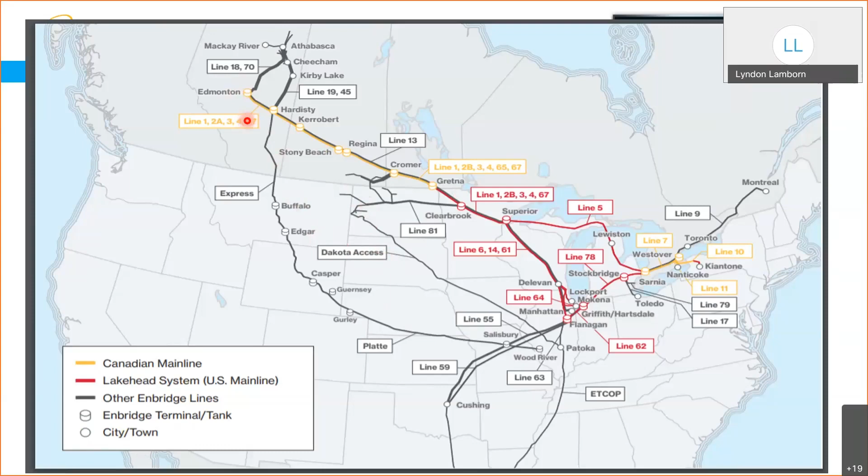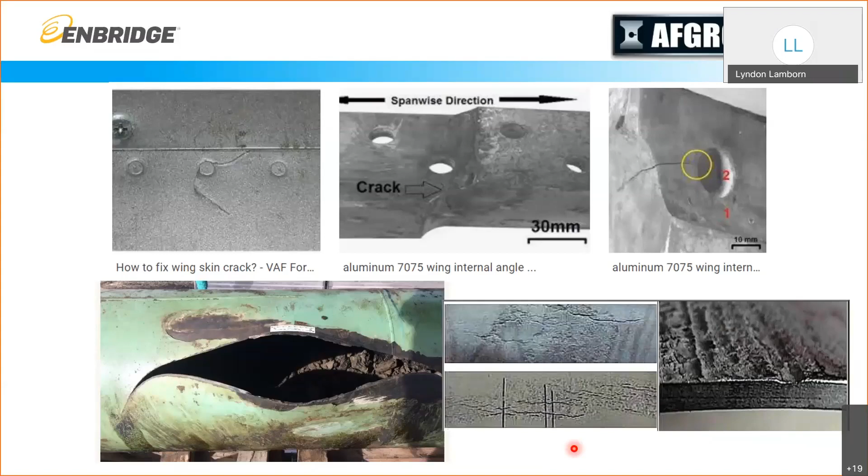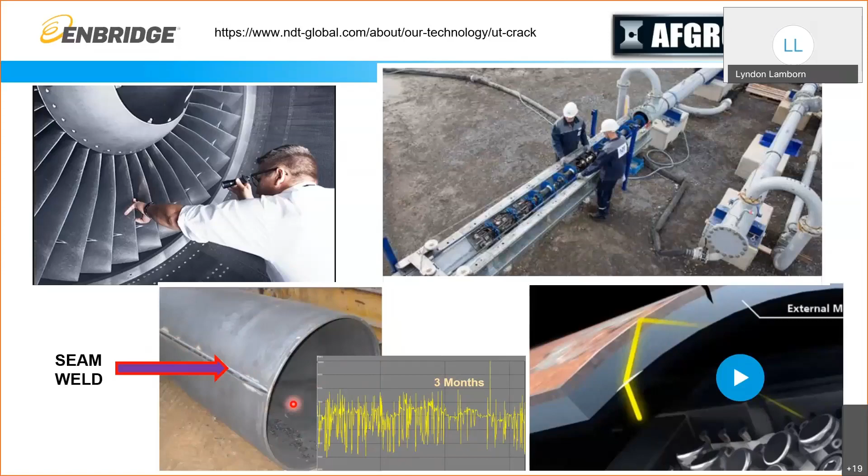And of course, this internal pressure change results in a cyclic hoop stress change in the cylindrical pipe, which all of you understand immediately gives you a cyclic stress with R greater than 0, particularly at this seam weld. And if you get a crack feature here detected by your crack tool that gives you dimensions, you can do crack growth analysis on that and predict how long it's going to last. So again, the similarities between aircraft crack management and pipeline crack management are huge.

So this would be a typical seam weld flaw that could grow and become a threat to the pipeline integrity that we're trying to avoid, and we invest a lot of money to avoid those incidents. In fact, you say, well, how much could these inspections really cost, Lyndon? You're just talking about pipelines here.

Well, I have 155 segments. We usually inspect between 3 and 7 year intervals, maybe average of 5 years. So I'm doing about 30 inspections a year on pipeline segments throughout the system. And a pipeline inspection can cost up to $1 million. Usually a little bit less than that, depending on the length and the age of the pipeline. But after you do 30 inspections a year, then you have to do excavations. You want to verify that your inspection tool is working properly.

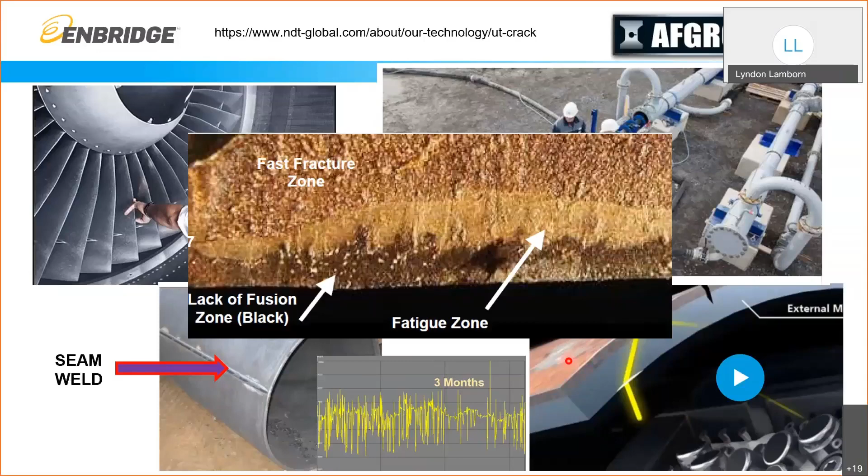So when I got to the pipeline industry, I was familiar with AFGROW and crack growth and looking at the threshold for no growth, which we use a lot in helicopters because helicopters are just flying fatigue machines. So we rely on characterizing the threshold for no growth quite a bit in helicopters. And imagine my surprise when I got to the pipeline industry, and the only thing anybody talked about was region B on the da/dN curve.

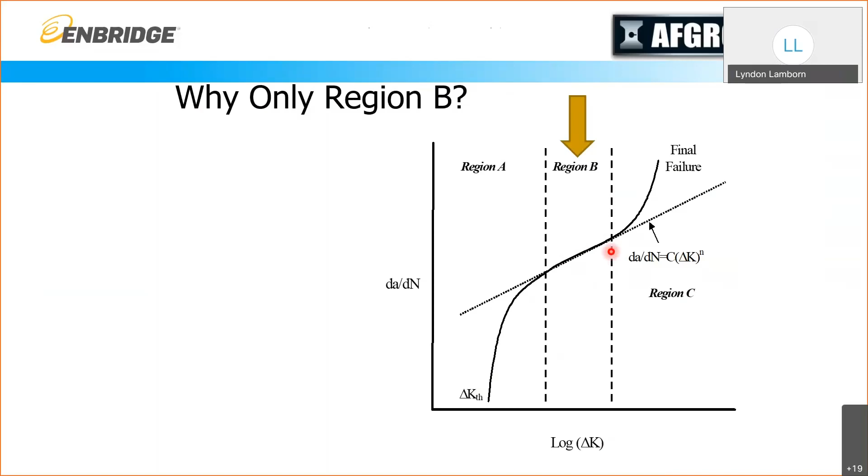And in fact, Jim could probably speak up at this point and echo his surprise. All the testing that we could find, or at least a large proportion of the testing we could find on pipeline steels, focused only on region B. There was nothing done outside region B. And so I was proposing, well, why don't we do some characterization of regions A and C and use the entire tri-region curve? Imagine my surprise when I got pretty much a negative response.

I was facing this situation, one of my favorite cartoons. Instead of evolution theory, you might put in here fracture mechanics theory, modern fracture mechanics theory. And the response I'm getting from most of my peers in industry is, this is hogwash. We don't need this. Region B is good enough. Even though we're spending hundreds of millions of dollars in crack management, all we need is region B. And so I'm stuck here on the second panel right now in the pipeline industry.

But I'm trying to move us toward this third panel where you see the emerging animal from the primordial soup here, that evolution theory, that modern fracture mechanics can be useful in the pipeline industry. And so that's kind of the mountain I'm climbing right now.

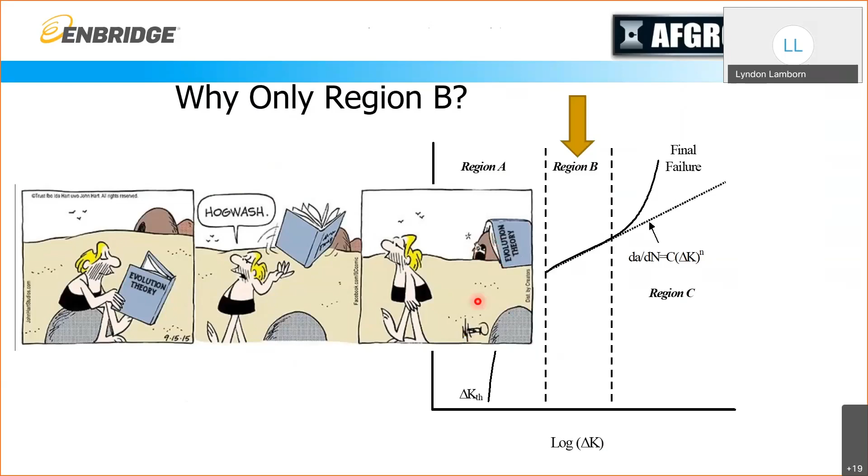So I asked Jim to help me look into establishing delta KTH, the threshold for no growth, for some pipeline steels. And as we kept peeling back the layers of the onion, I found some more data, and Jim found some more data, and before you knew it, Jim felt he had enough data to actually build a tri-region curve for a range of pipeline steels.

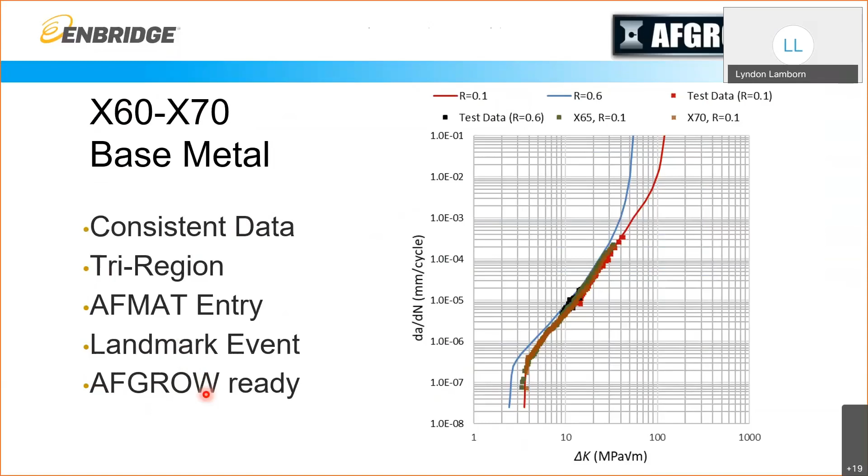Now, you say, what is X60 and X70? These are pipeline grades. 60 refers to 60 KSI yield strength, and 70 refers to 70 KSI minimum yield strength. And so for the first time, just in the last couple of months, we actually have pipeline steels in an AFMAT entry. And this is a landmark event. I'm very excited about it. And hopefully we'll get to do the others because that is only scratching the surface.

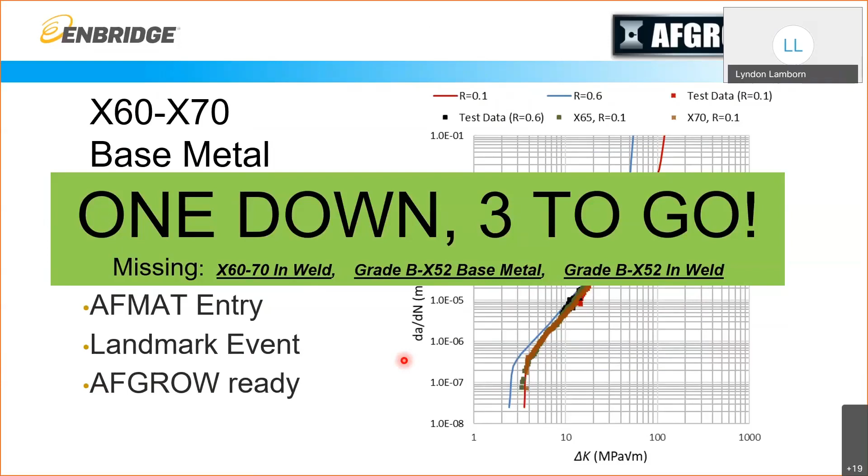The base metal; we do a lot of analysis for cracks in the weld, and so we'll need to characterize that, which the industry pretty much knows is a little bit different. And then we'll have to do it also for these other alloys, both base metal and weld. So just characterizing the material, which is almost an assumption for aerospace materials, that your materials are highly characterized and you have robust database information to go on immediately. Such does not exist in the pipeline industry.

So my last slide here. So we're really at a grassroots building block stage in the pipeline industry for use of advanced fracture mechanics. We're currently using it for these simple things, but these things have already had a huge impact. If we have to shut down a pipeline, it can cost us $50,000, $70,000, $80,000 per hour. And if we can avoid that through some advanced analysis techniques, obviously that's a good payback.

We are projecting in the future to use this aerospace level type analysis, particularly for root cause analysis. We feel like we learn a lot from our incidents in the pipeline industry, similar to what you folks do in the aerospace industry. With root cause corrective action, you can peel back a few more layers of the onion when you have advanced fracture mechanics to help you understand the stress states and the crack growth trajectories, as you know.

And then when I say a level 2 analysis method, for those features that are difficult to get to, say I have a crack underneath the Missouri River that I wouldn't be able to get to fix. I have to schedule a new pipeline replacement. I'd have to drill underneath the Missouri River. I'd have to get the Army Corps of Engineers involved. It's about a 5-year process. And so if I can do some more accurate analysis of that particular crack, that can be very, very valuable to us.

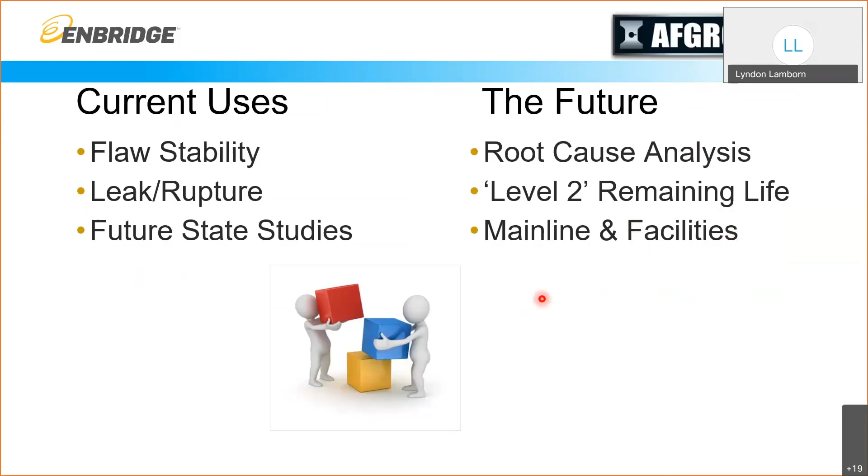So thanks for your attention. I guess it's time for questions, if there are any. I know this industry is probably a little bit different than what you're used to. I'm still socializing the use of advanced fracture mechanics in the industry. So if I can, maybe I can get the chat window up here somehow.

Well, Lyndon, I want to echo again that it's good for us to get other perspectives into the AFGROW workshop. So I want to thank you for being willing to give the presentation. Happy to do it, Tim. Okay. There's a question up on the chat. You see it? I can't see it. I don't know how to. I'll read it to you.

Yes, please. Okay. Is the industry implementing any pipe manufacturing changes, for example, to welding, to try to improve new installations? Well, that's a great question. There's been a continuous evolution of improvements to welding. And it's applicable to both the long seam weld and the girth welds. Because inspection techniques, radiography and ultrasonic inspections, have been improving over the decades, the specifications and regulations have tried to keep pace and enforce better and better quality going forward. So that's a great question. Yes.